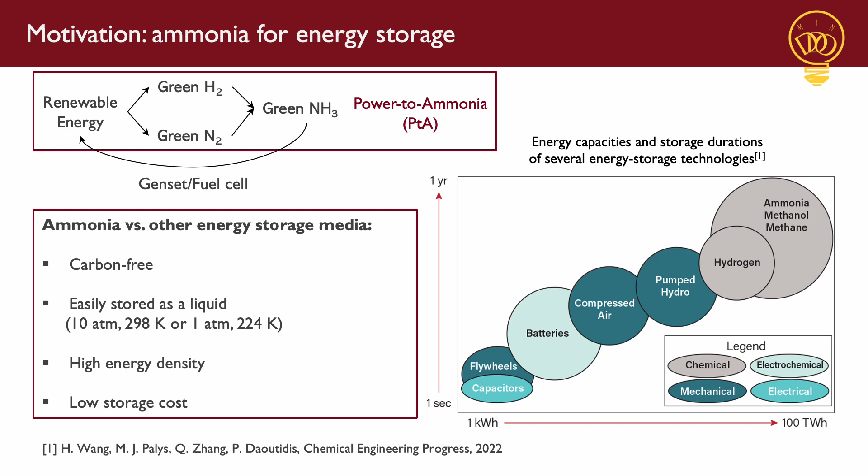So given those merits of ammonia, it's natural to consider incorporating it into a microgrid as an energy storage unit. A microgrid is an integration platform for power supply, storage units, and energy resources. And here the energy storage units play an important role in the microgrid to resolve the mismatches between the renewable energy and the power demand.

However, such studies only focus on the design and scheduling problems, neglecting many details in the process, such as the hydrogen production or ammonia production. And the feasibility of the real-time operation and control of such a system has not been demonstrated yet.

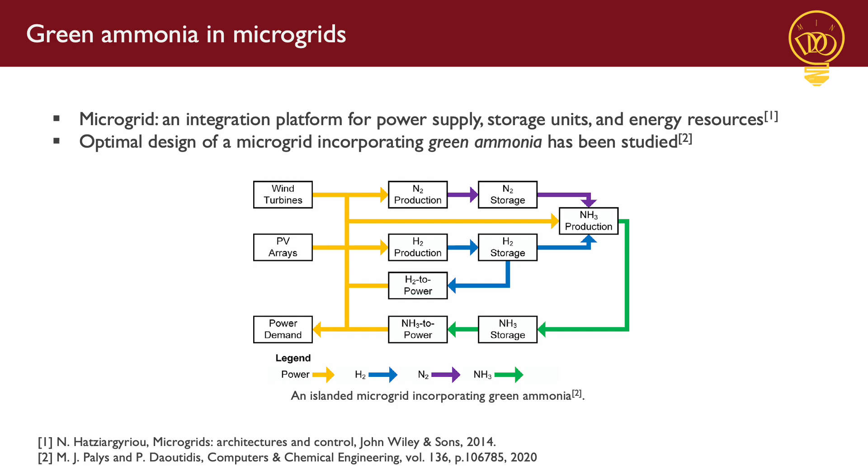So let's talk about the operation and control of microgrids. There are actually various control strategies proposed and implemented for microgrids, such as centralized control, distributed control, and hierarchical control. But the real-time operation and control of a microgrid incorporating ammonia synthesis, storage, and conversion to power has not been explored yet. There is a new challenge that ammonia can bring to the control of microgrids.

It's because the ammonia synthesis process is pretty slow. The ammonia production is subject to the available renewable energy and the hydrogen inventory, so it cannot be produced at a constant rate all the time. But the transitions between different production rates are very slow, and can take up to hours to finish. And this may cause the depletion of energy storage media or even the failure to meet power demands if there is not a proper strategy to regulate storage inventories and meet the demands. So a proper control architecture is needed.

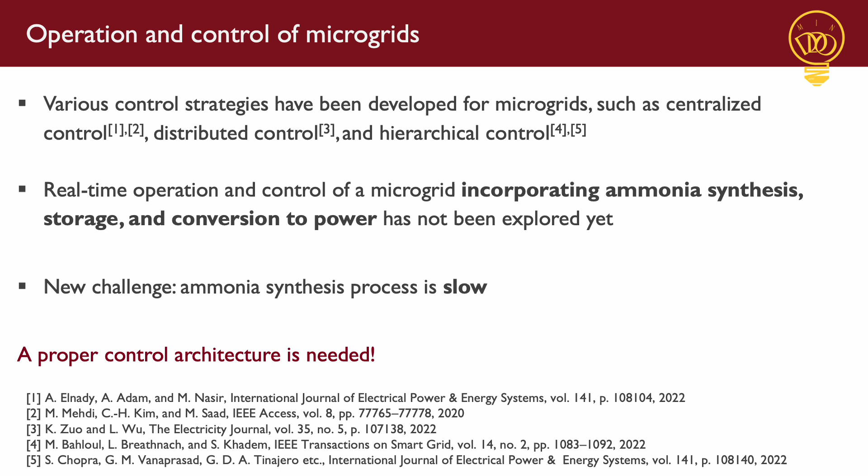So here it comes to the problem that we are trying to solve. We're considering the real-time operation and control of an islanded microgrid with both hydrogen and ammonia for energy storage. And in this system, wind and solar energy are the only energy sources, and the demand to be met here is the residential demand. The power exchange with the main power grid is not in the discussion.

And we want to have a control strategy that can meet the local power demand and maintain the stability of the system, such as the temperatures in the reactor beds and at the membranes and the pressures in the storage tanks, and we want to minimize the operating cost of the system. So the challenges include the intermittent nature of the wind speed or solar irradiance, and the ammonia synthesis process is slow, like we already mentioned. And also, even though we can get some forecasting data of the wind speed or solar irradiance, the actual data can be very noisy.

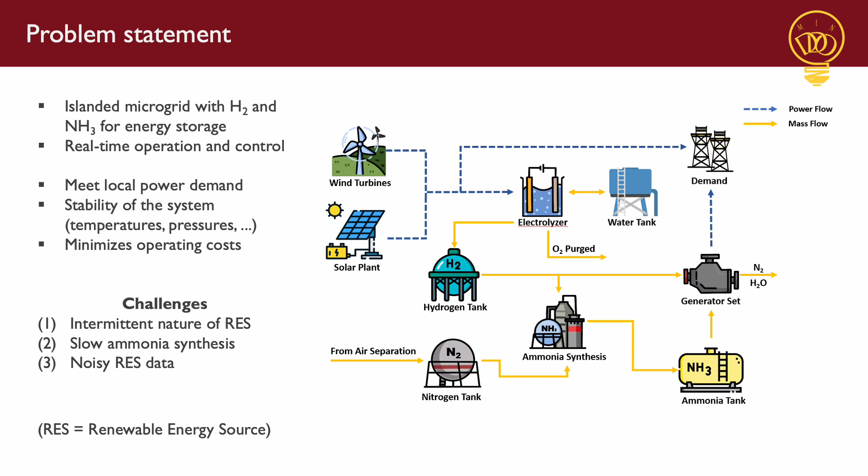So to address those challenges, what we adopt is a two-layer hierarchical control structure. It consists of two layers. The D-RTO layer works as a supervisory layer, which minimizes the levelized operating cost by solving an optimization problem with a receding time horizon. It can get the forecasting demand profile and the prediction of the renewable energy source data and the real-time storage inventories through a communication with the local layer, and make decisions on a bunch of variables such as the power used for electrolysis, the storage inventories, and the ammonia production rate.

The local layer actually refers to the local controllers in the subsystems. And most of these local controllers are linear controllers to enforce the commands from the D-RTO layer. And these decisions or the commands are updated hourly. So it means the RTO problem is solved at each hour.

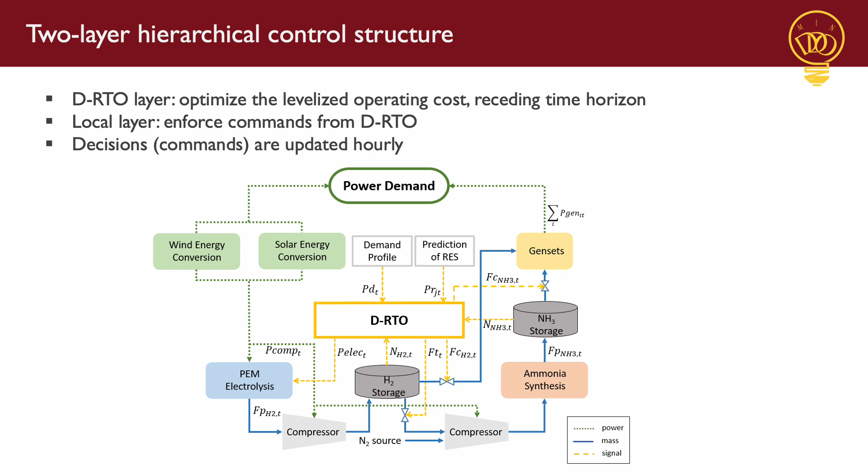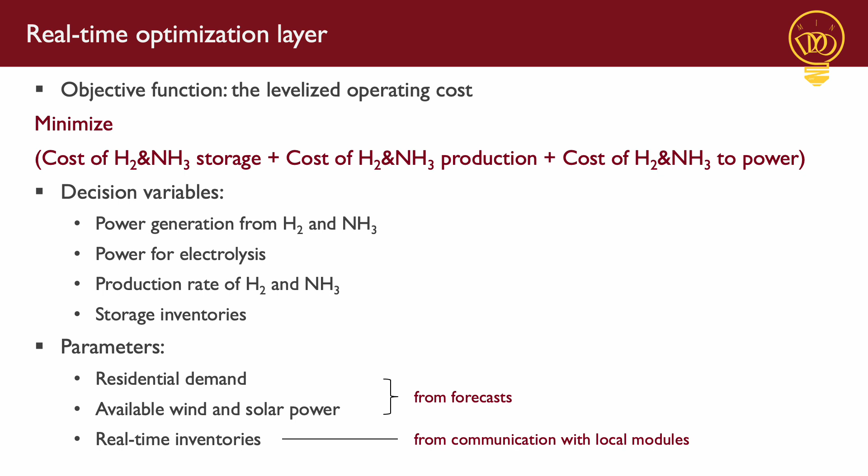So let's first take a look at the real-time optimization layer. The objective function is to minimize the levelized operating cost, which consists of three parts: the cost of hydrogen and ammonia storage, the cost of hydrogen and ammonia production, and the cost of converting hydrogen and ammonia to power. The decision variables include the power generated from hydrogen and ammonia, the power used for electrolysis, the production rate of hydrogen and ammonia, and the storage inventories. Parameters include the residential demand and available wind and solar power from the forecasts, and the real-time inventories, which came from the communication with the local modules.

And the constraints include the power balance, the hydrogen production, the relation between the hydrogen production rate and the power for electrolysis, the ammonia production rate and the hydrogen consumption, the power generation from the chemicals, the inventory balances, and the lower and upper bounds.

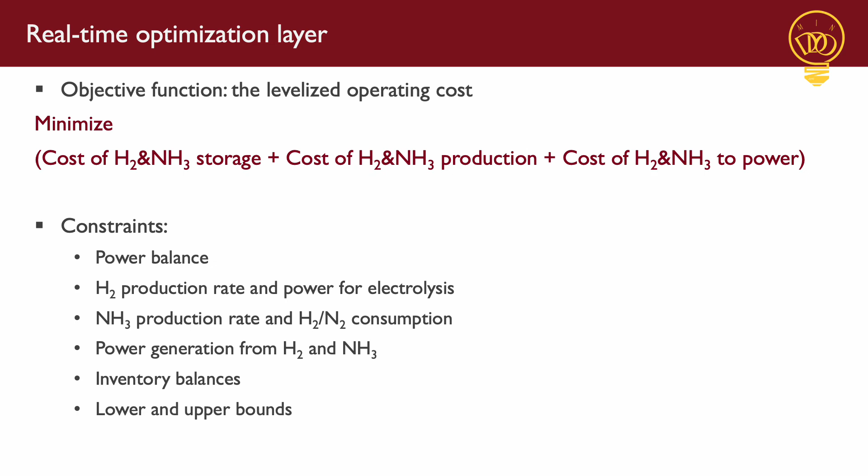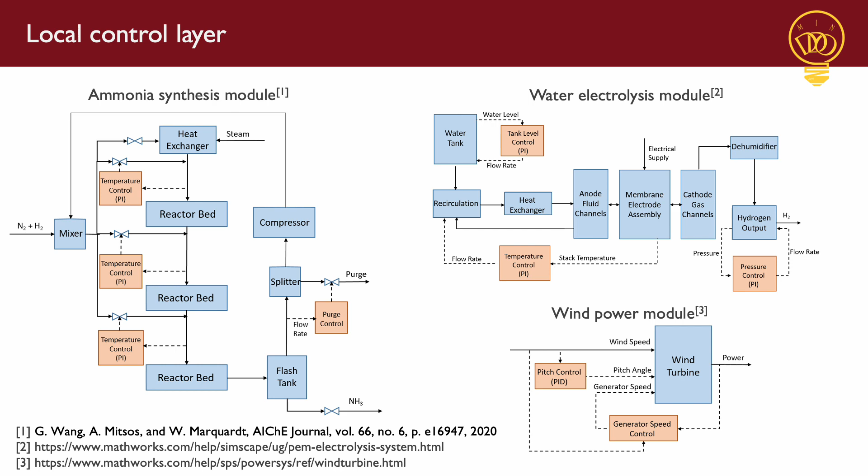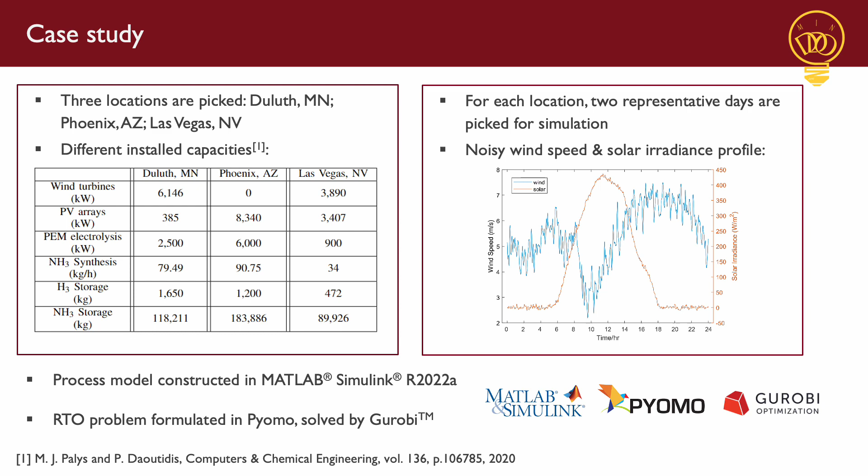And for each of these locations, two representative days in different seasons are picked for the simulation. And here we consider the noisy wind speed and solar irradiance profile. Here is an example. The blue line is the noisy wind speed, and the red one is the solar irradiance. We can find there is a peak in the middle of the day of the solar irradiance. The process model is constructed in MATLAB Simulink, and the real-time optimization problem is formulated in Pyomo and solved by the solver Gurobi. So let's first take a look at the results of Duluth.

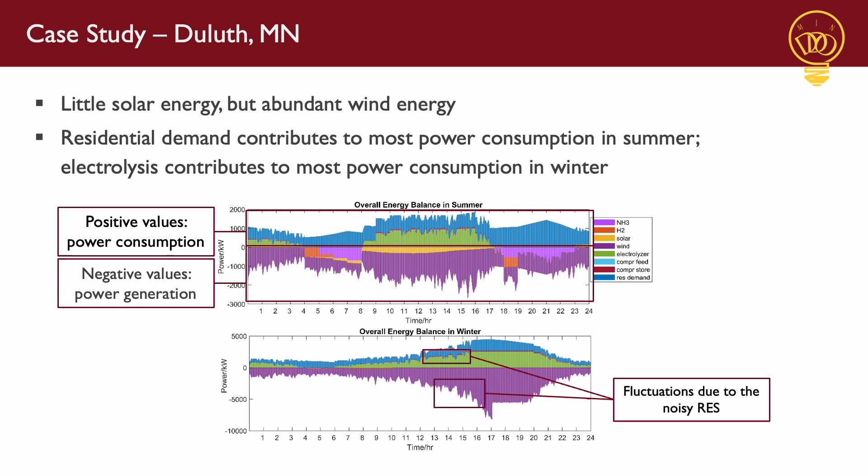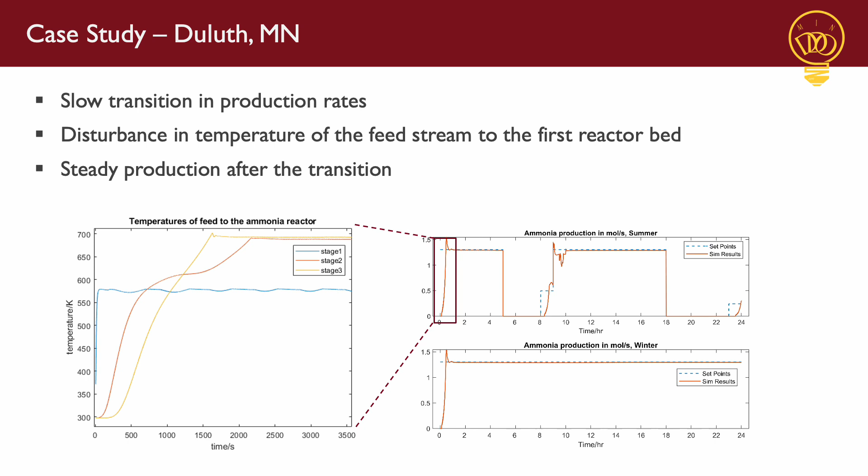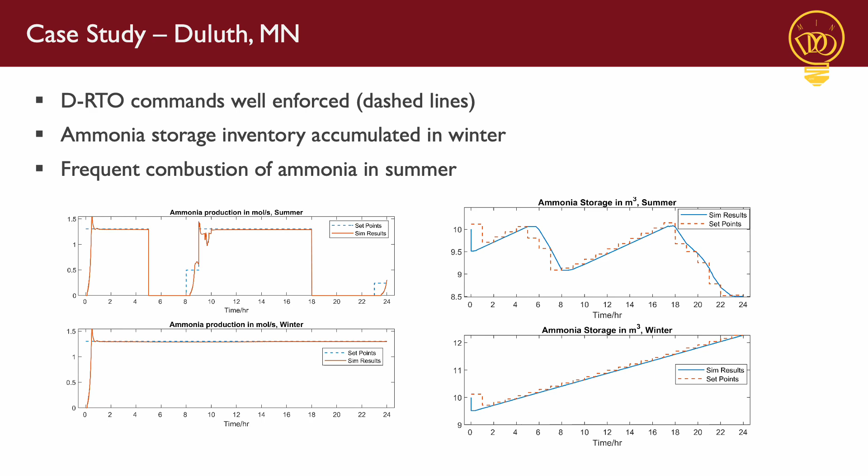And here, this plot shows the ammonia storage profile in summer and winter. We find even though there are occasional deviations between the real-time storage inventory and the set points, the D-RTO commands are in general very well enforced. And the ammonia storage inventory is accumulated in winter, and frequent combustion of ammonia is found in summer, which is consistent with what we saw in the power balance plot.

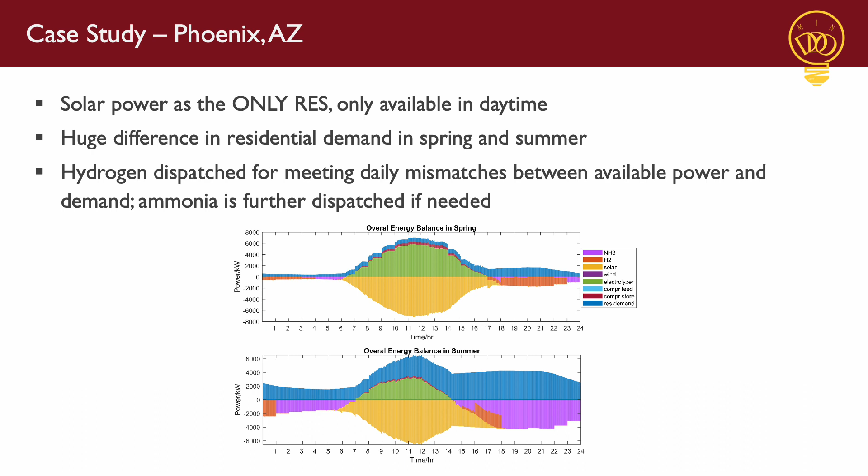But late in the day, when there is no solar energy, the dispatch of hydrogen is needed to meet the daily mismatch between the power supply and the power demand. And in summer, the residential demand is pretty high, so we find the dispatch of ammonia is further needed. And we can find the ammonia inventory slowly increases in spring, but decreases in summer to meet the power demand.

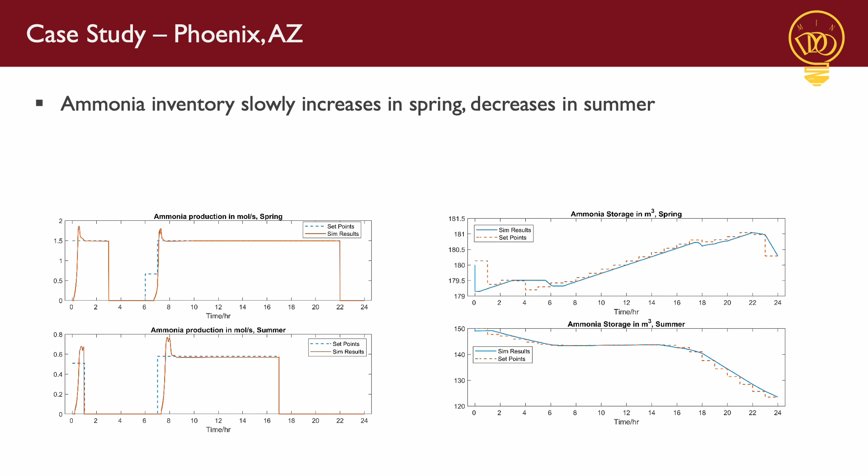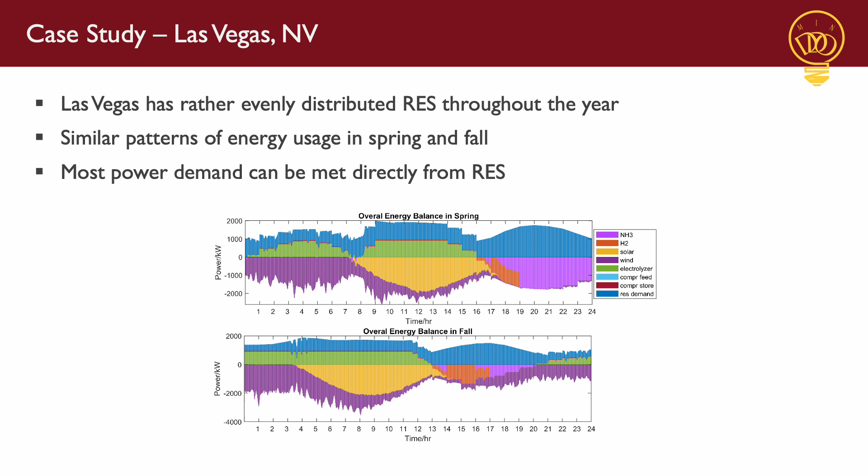And by introducing ammonia, the daily cost can be reduced by at least 23%. And there is a case, which is Duluth in winter, where we find the cost reduction can be as high as 60% by incorporating ammonia. The more the microgrid relies on energy storage, the more it can benefit from incorporating green ammonia for energy storage.

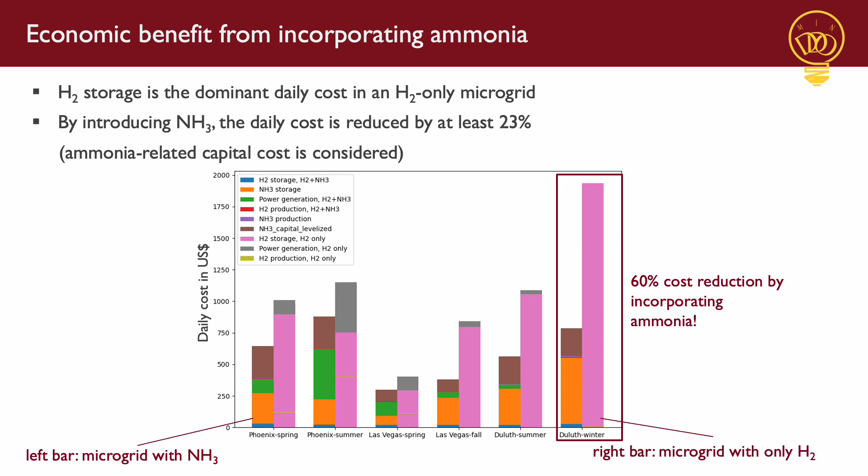And in summary, in this work, we have a dynamic modeling of the microgrid incorporating green ammonia production, storage, and conversion to power. And we demonstrated the feasibility of the real-time operation of the system by implementing a two-layer hierarchical control. We find that residential power demand is met, which is a priority, and the RTO commands are in general very well enforced. And we have reviewed the geographic differences of these locations in the operation aspect. And finally, we note there are significant economic benefits of incorporating ammonia into the microgrid.